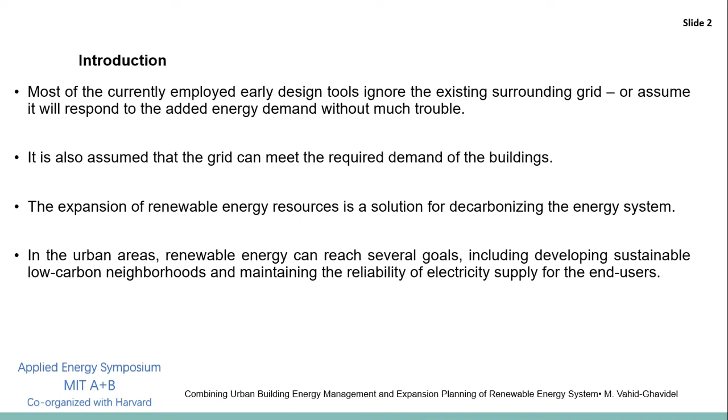So, in urban areas, renewable energy resources can reach several goals, including developing sustainable low-carbon neighborhoods and maintaining the reliability of electricity supply for the end users. You can see the changes in the current electricity grid. In the conventional electricity grid, the electricity flow was in a single direction from the generation side to the demand side. But nowadays, the energy flow can be in both directions, from the demand side and also from the generation side.

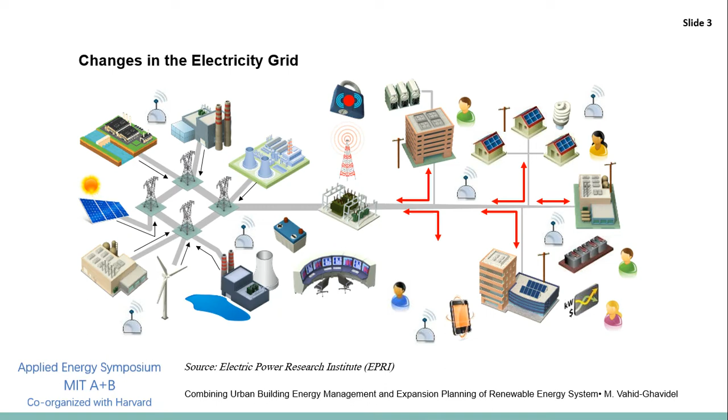There's also another definition called the zero emission neighborhood. In a zero emission neighborhood, both the generation and consumption sides are equally important for making robust and efficient energy planning decisions. On the generation side, the aim is estimating the renewables potential and identifying the optimal generation portfolio, and on the demand side, the aim is to estimate the future building loads and their variations over the year, considering available energy efficiency and demand-side management technologies.

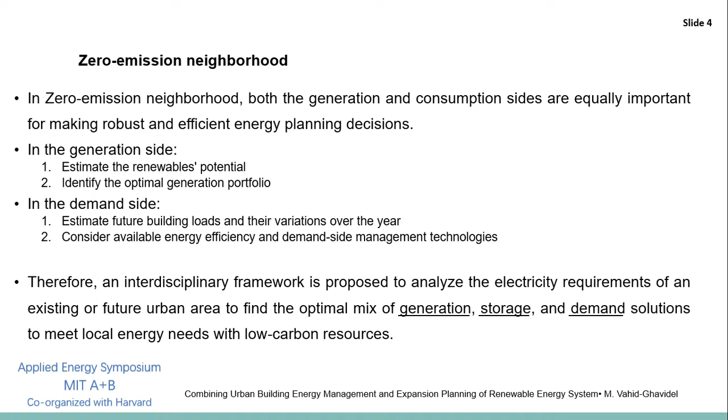Therefore, an interdisciplinary framework is proposed in this work to analyze the electricity requirement of an existing or future urban area to find the optimal mix of generation, storage, and demand solutions to meet local energy needs with low carbon resources. This is the overview of the project. As I mentioned before, this work is being developed by two teams at MIT. The first section, the energy optimization framework, is done in LIDS, and the second section, the urban modeling interface, is developed by our colleagues in the MIT Sustainable Design Lab.

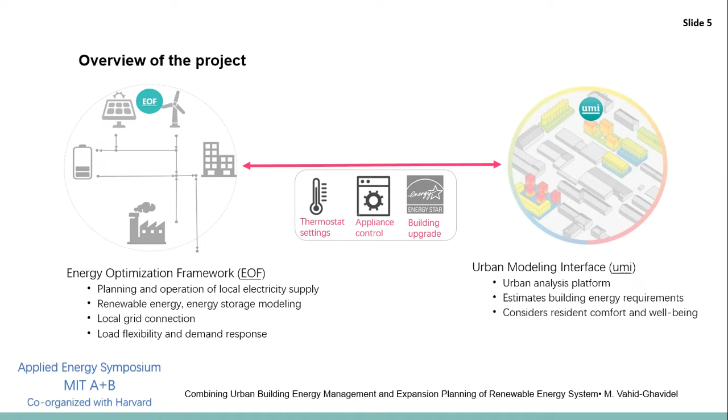Our goals in the energy optimization framework section are planning and operation of the local electricity supply, renewable energy storage modeling, studying the local grid connection, and also studying the load flexibility and demand response. And our colleagues in the urban modeling interface are working on the urban analysis platform, estimating the building energy requirements and also considering resident comfort and well-being.

In the model that we have worked on, it is assumed that the buildings can participate through demand side management, and that our neighborhood is connected to the grid and is also equipped with storage, which is lithium-ion batteries, and renewable energy resources such as rooftop PV panels and small-scale wind. We have inputs like the hourly demand requirements, from RC models provided by our colleagues from the MIT Sustainable Design Lab, and also hourly solar and wind capacity factors.

There are other inputs like technology costs and fuel prices, and local energy market prices and emissions. We optimize the generation capacity and hourly dispatch to obtain the hourly load dispatch and building temperature, optimal cycling of storage units, total system costs, the energy costs for the consumers, the renewable share, and also impacts of emissions policies.

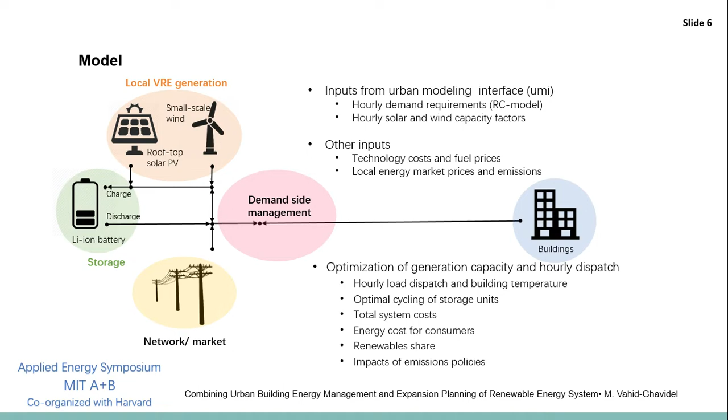Our mathematical problem formulation is designed as a distributed generation planning model, which is a mixed integer linear programming problem with the objective of minimizing the investment and operation costs of the renewables and energy storage units, as well as purchasing from the grid. Our constraints are the energy balance, generation unit operational constraints, building thermal modeling for demand-side management purposes, battery constraints including the degradation costs, and also CO2 emissions constraints.

As I mentioned before, we have considered our building as an RC model. In this RC model, each building or each room is considered with specific amounts of resistance and capacitance. With this resistance and capacitance, and also having information about the ambient temperature, we can reach the relation between the room temperature and the ambient temperature, as you can see here.

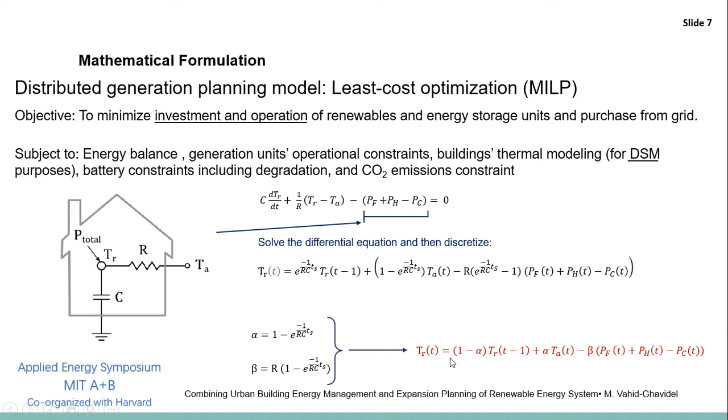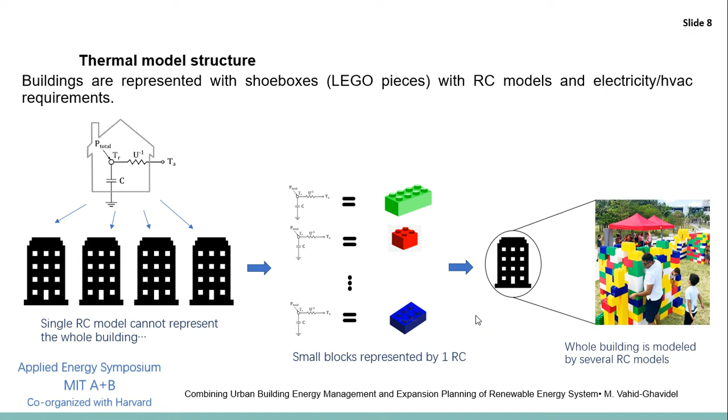And we are assuming that the buildings are represented as shoeboxes or Lego pieces with the RC model. So each building consists of specific RC models; we just consider it as a shoebox with an RC model. With this information, we can do our analysis and optimization.

Our case study is a neighborhood in Chicago, Illinois, with retail, community and residential buildings, and also offices. We have considered that the number of occupants is around 15,000 people.

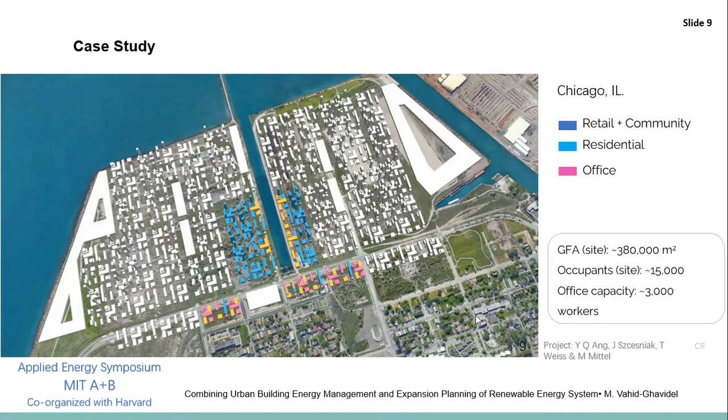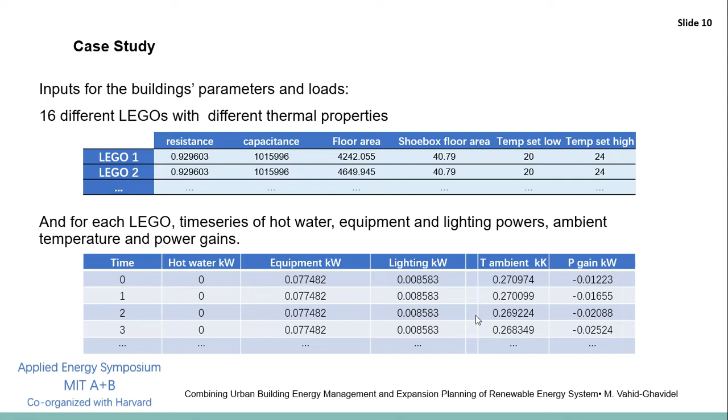The inputs for our case study: we are considering 16 different Legos with different thermal properties, and also for each Lego, the time series of hot water, equipment and lighting power, ambient temperature and power gains are also given. There are a series of assumptions for the grid, renewables, and storage, such as the hourly locational marginal prices, hourly carbon intensity, and hourly PV and wind local capacity factors.

As scenarios, we are considering several. In the first scenario, we consider that our neighborhood is working with only the grid, or business as usual, so it is not connected to the renewable energy sources, nor the battery. In the second scenario, grid plus battery is considered. In the next one, only grid and renewables are studied, and in the other one, the grid with both renewables and battery is studied.

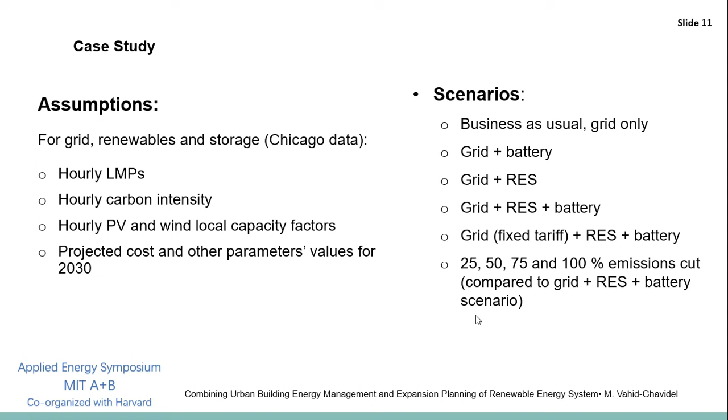In the next one, we have considered that the prices from the grid are fixed tariffs, so there is no variation over the day for the different hours, with the renewables and battery. And in the last case, we consider that if we have 25, 50, 75, or 100% emission cuts, how much energy or installed capacity we need to have.

As a result, in this figure you can see the installed capacity in different scenarios. The first scenario is business as usual, so there is no battery or renewables. By considering battery, you can see that a percentage of the penetration from the grid will be covered by the battery. But if we consider our model with the grid with only renewable energy resources, we will require a high investment in PV. This is because of the uncertain nature of PV production. Because of the high uncertainty level, we require a high installed capacity to meet our demand.

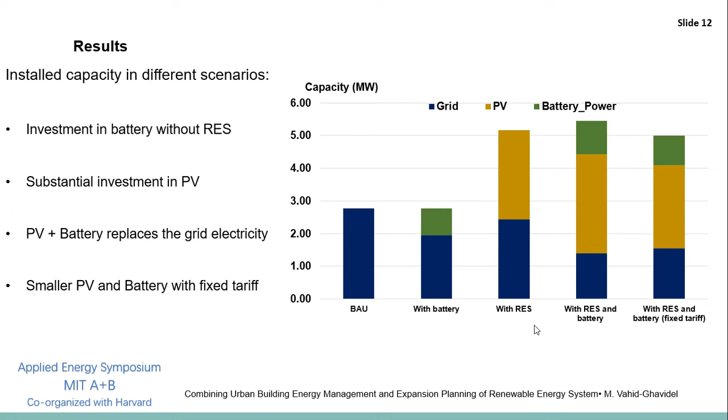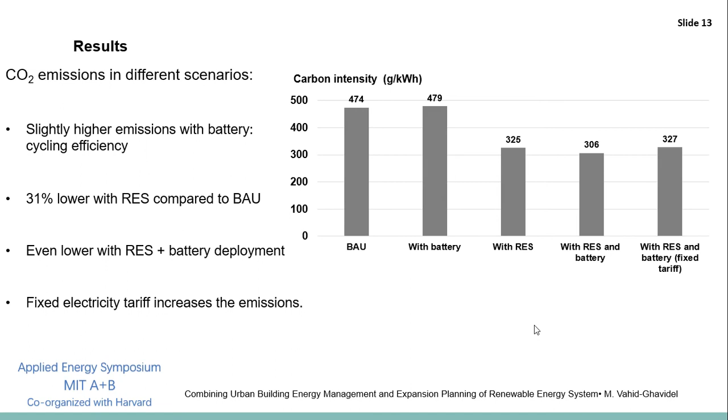In this result we also have the CO2 emissions for different scenarios. The business as usual carbon intensity is around 474 grams per kilowatt hour. With the grid with only battery, we have slightly higher emissions due to the cycling efficiency. But with the grid with only renewable energy resources, we will have a 31% lower carbon intensity compared to business as usual. And we will have even lower carbon intensity if we combine both renewables and battery storage with our grid. But in the last one, due to the lower energy prices with the fixed tariff from the grid, our emissions will be increased.

There are also results regarding the carbon emission reductions. In the top plot, there's the installed capacity in different emission scenarios. You can see the dominant role of PV in all of the scenarios, and the other noticeable point is that if we want 100% emission cuts, or zero emission planning, we need a 6 times larger installed capacity compared to 25% emission cuts.

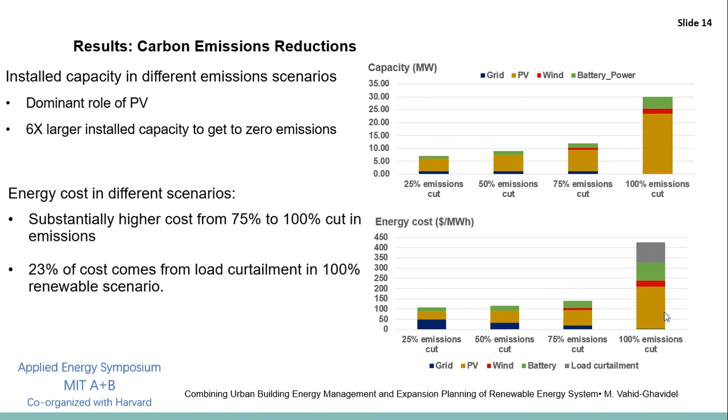In the bottom figure you can see the energy costs in different scenarios. The energy costs from 25% to 75% do not have a very large difference, but we will have a substantially higher cost when we jump to the 100% emissions cut. This is because 23% of the total cost comes from the load curtailment due to the demand response programs.

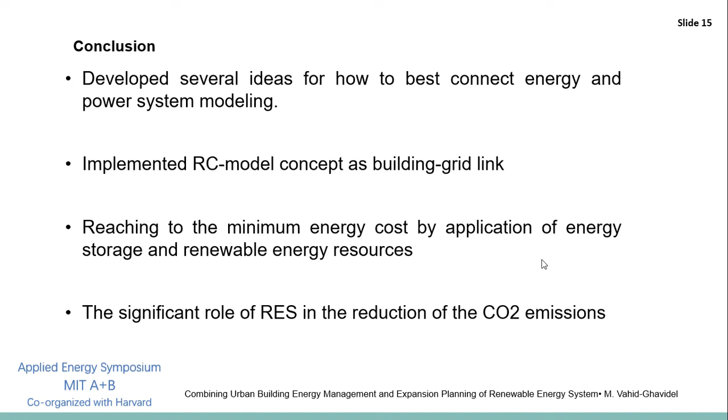As a conclusion, we have developed several ideas for how to best connect energy and power system modeling. We have implemented the RC model concept as a building-grid link, reaching a minimum energy cost by application of energy storage and renewable energy resources. And the significant role of renewable energy resources in the reduction of CO2 emissions has been shown.